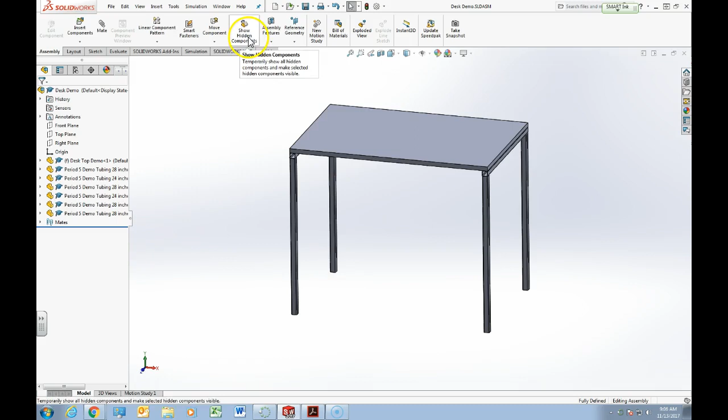This is a short video about how to make an assembly drawing including a bill of materials for your desk. So here we go, just a simple example of a desk type part. You could either come here to make drawing from part assembly, or over here make drawing from assembly right here. Same thing. We're going to use this B size paper, 17 inches wide, 11 inches tall. So B ANSI landscape. Okay.

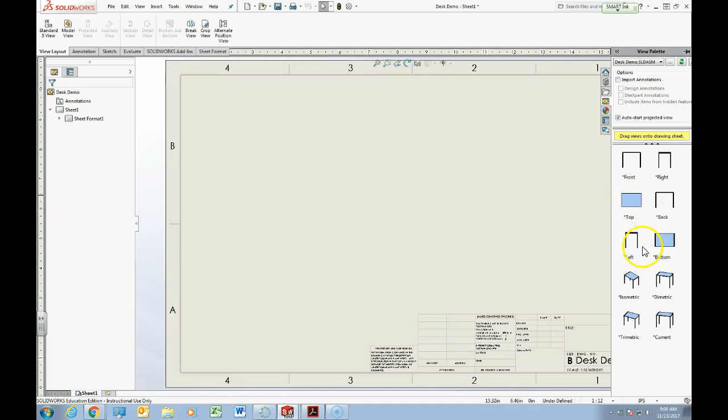Bring in the front view here. Keep in mind this is still in first angle projection, which we're going to want to come and change. So this view up here, do isometric view, but this view up here is the worm's eye view. And we alter that by coming here and going to properties, third angle projection, apply changes. And now that's the way we want to see that. And we've got our isometric view over here.

Okay. Now what we're going to do though is we're going to go to insert and go to tables, and we're going to do a bill of materials. We don't need to change anything here. We're going to leave with the defaults. You click check. Now this thing called the bill of materials will come into your drawing, right? What this does is it gives us information about what parts are actually used to create the assembly.

And one last thing we can do here is then go to insert, annotations, auto balloon, and it's going to ask you for the drawing sheet view to insert the balloons. We're going to do it. Oh, or that could even work on our isometric view. That's kind of cool too. You could potentially have selected the front view, but if you've got your isometric view, that works pretty well too. Click check there, and now we can actually move these balloons around.

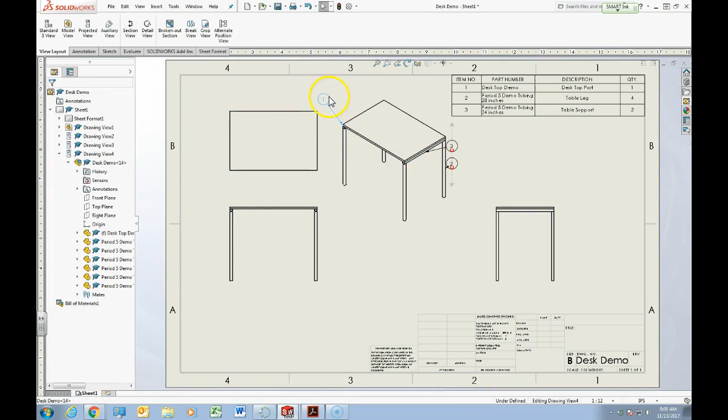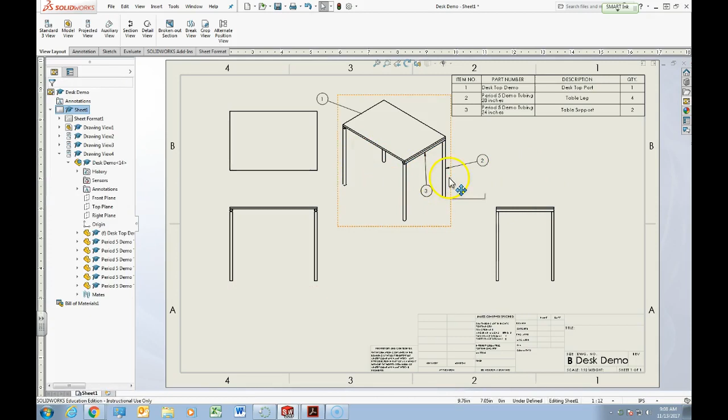And the cool thing is that these numbers interface with the item numbers in your bill of material. And if you were to add another part or anything, this bill of material will update itself and even the quantity of each of the parts. So that's a very helpful tool when you're making assembly drawings, so that your customer or whoever is assembling this knows exactly what parts, where they are, and how many of them are required for the assembly.

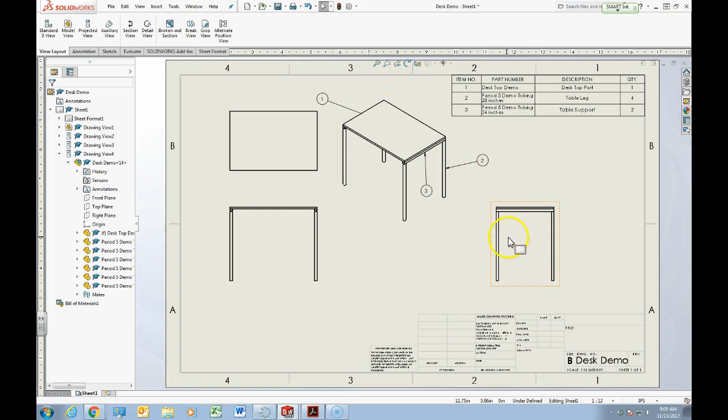The other thing you can do here is, in yours likely this description is not populating underneath here. It's an open-ended, unfilled-in table. If you double click in here and click on keep link, you can actually type these letters and values in, whatever you want to call this. Table support. Just another cool function that's in here. We'll actually relate back into the file, the part file that was used, each of these components, but that's a cool thing that you can do as well.